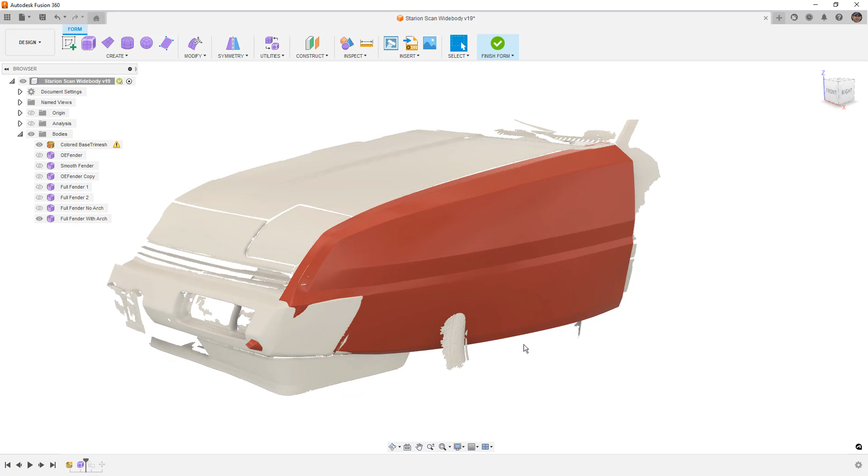So as we explored in the last video, it was very tricky for us to get these straight edges or lines after the fact. It was just way too difficult for us to do. So we took a step back, we got rid of all of that information in the middle, and we patched it up so that it would essentially be a fender without the opening. So now we're going to talk about how we can put that wheel arch back in.

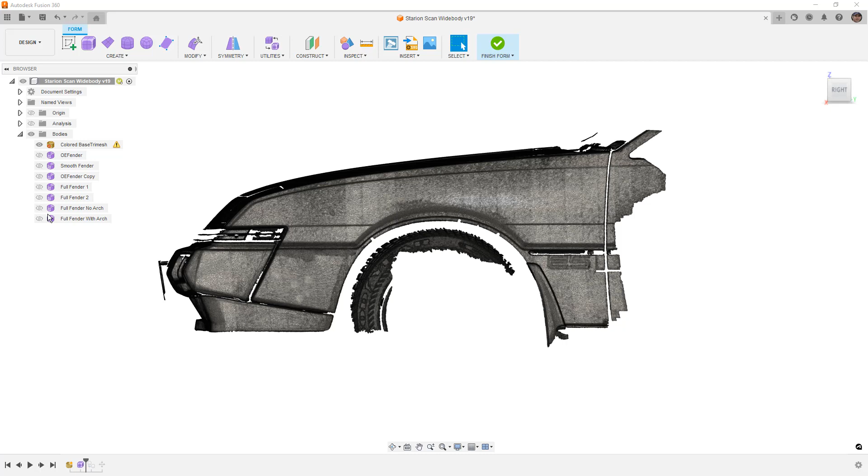However, there were some things I didn't like about it because, as I mentioned, I really want to carry these hard body lines through the design. That's something that Mitsubishi didn't do when they made the wide body version of this car. These lines were just not there on the wide body version. They started to pick up right before the door and they disappeared on the rear fender as well. So I really want to carry that design element into this wide body version.

So at this point, we want to be happy with what we have on the screen because it's only going to get harder for us to make adjustments. Because this is, I'm sure, not my final version of this, I'm going to continue on with it. But if there's anything that you want to change or fix, now is a good time to do it. The next step for us is to take one of the smooth fender designs. It doesn't really matter which one. And we are going to copy the opening.

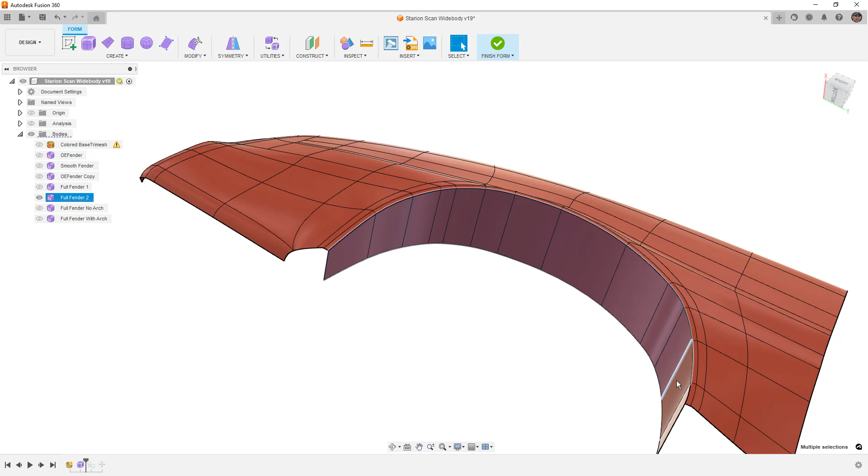So you can take the one that we did previously. It doesn't really matter because all we're doing is taking this inside piece and making some adjustments. So I'll take this one. This is the last one that we did. I'm going to copy these inside faces and just rotate this around a little bit. And just like before, Control C, Control V. Then what I have is essentially the open wheel arch. We're going to bring back our full fender with arch and see where this thing hits.

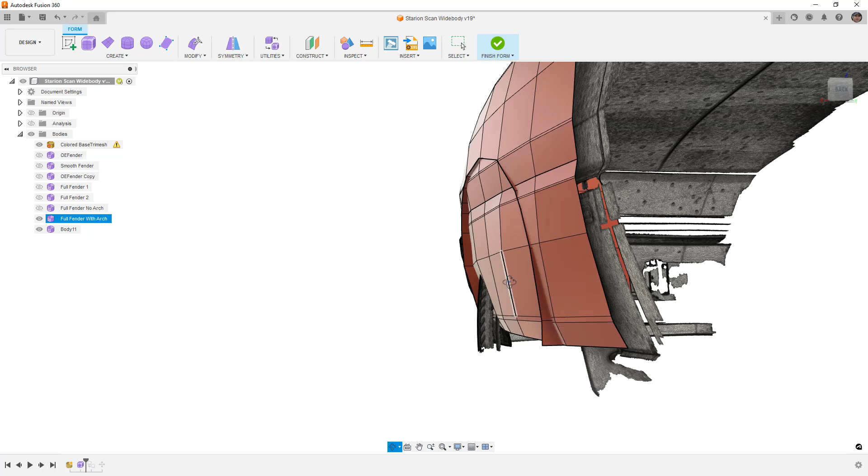Now, if this is behind anything, now is the time to fix it because this is going to be really tricky for us to patch. So that either means adjusting the fender flare, pushing this back closer to the car, or pulling this further away. One thing that I do want to note is at the bottom of this, and let's go ahead and make it box display, it flares out like the original because I have the mud flaps on this car. Obviously, we're quite a bit wider than the original, but that is the reasoning for why it flares out.

And then we also want to make sure that we take a look at the overall shape of the fender. So it bulges out and then it goes straight in the back. If that's the intent, perfect. But again, now is the time to fix it. So I'm going to take this outside edge and use Modify Edit Form. I'm going to reset my pivot point and put it down here in the front because I like that location. And then I want to rotate this thing. That's going to give me a little bit of extra room to play with, to space things out.

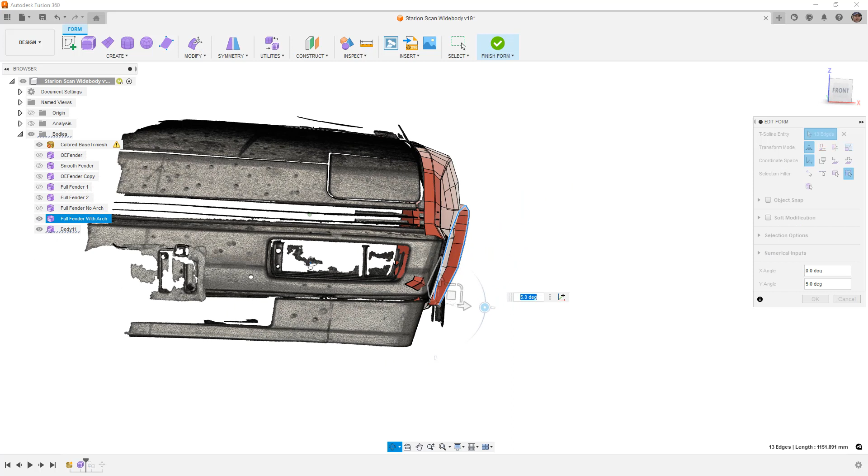And as long as we're happy with that shape and that location, then I'm going to left click and move forward with the next part. Now the next part for us is going to be to make a fender lip. Now remember, when you're extruding from something like a wheel arch, we want to try to get that pivot point as close to the center of the wheel as possible.

So when you reset a pivot point like this, you can't select anywhere that there's not geometry. So we really need to have something to select, but then we can manually move it down and get it close to where the center of the wheel is. Then if we use Alt, we're going to extrude the edge. Alt and Control will extrude with a crease. Because ultimately we probably aren't going to have a crease there, you could do it with or without.

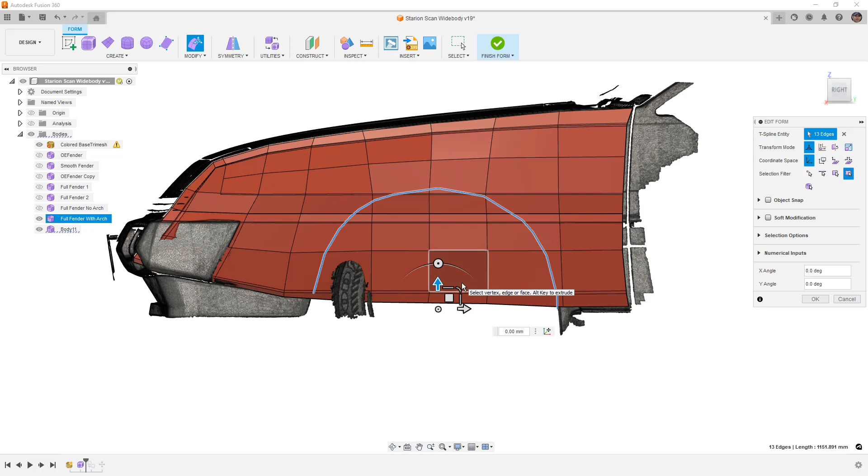I'm going to do with. It's just kind of what I generally do. And I'm going to just extrude that out. And for now, I'm going to say OK. I'm going to go to my Insert Edge. And I want to figure out where I want this edge or this lip to be.

Now, one thing that is extremely difficult to do in forms is to get a nice, consistent width on a face. Using this method of scaling out from a pivot point that's at the center of the wheel does help, but this is one of those areas, just like adding those straight edges, that is really difficult to do. So make sure that you take some time and just work with this geometry as best you can.

So now that we have this, the next thing that we want to do is figure out where the edges on the surface underneath hit this design. Because ultimately we're going to trim away a lot of this geometry using Insert Point. And then after we trim it away, we are going to start attaching it to the fender lip in this case. So in areas where we don't have any edges like this one, I'm going to double click it to make sure I grab the inside portion of it. And I'm going to hit delete.

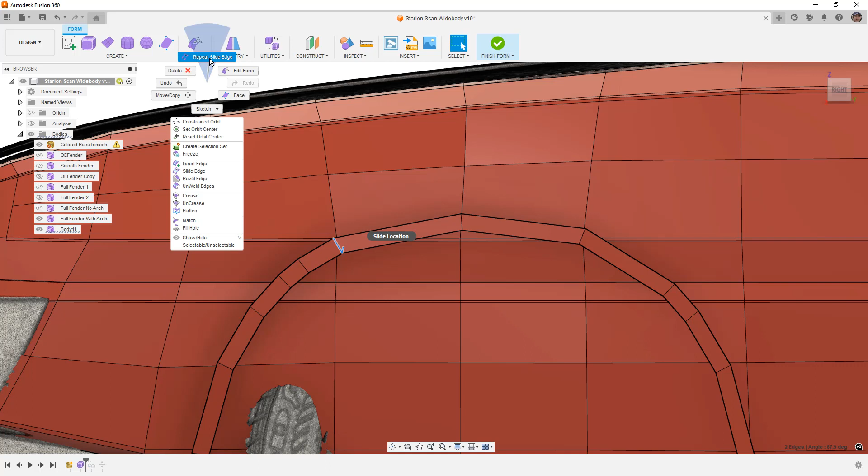Now this is problematic because now we have this weird flat spot here, and if we go into our smooth display, it might not match the car anymore. You can see how it's kind of dipping down there. So we want to make sure that we address that, and we're going to do that by using Modify and Slide Edge. We're going to pull this one closer to the center, and probably take this one. I don't know why that slide location is staying on the screen, but we're going to take this one and maybe pull it to the right a little bit. So that'll help. We will have to do some adjustments after the fact, but that gets us closer.

This one here, again, there's nothing for it to attach to, so I'm going to delete. This one is relatively close to this edge, so I'm going to leave it. This one's close to this edge, so I'm going to leave that. This one's close there, and this one's close there. And again, this is part of the reason why we did that original exercise of making the OE fender, because we looked at where all these edges were in order to make this shape, and that dictated things downstream. Now obviously this original shape is very smooth because we didn't add all the edges to control it. That's the basis for what we've done for pretty much everything.

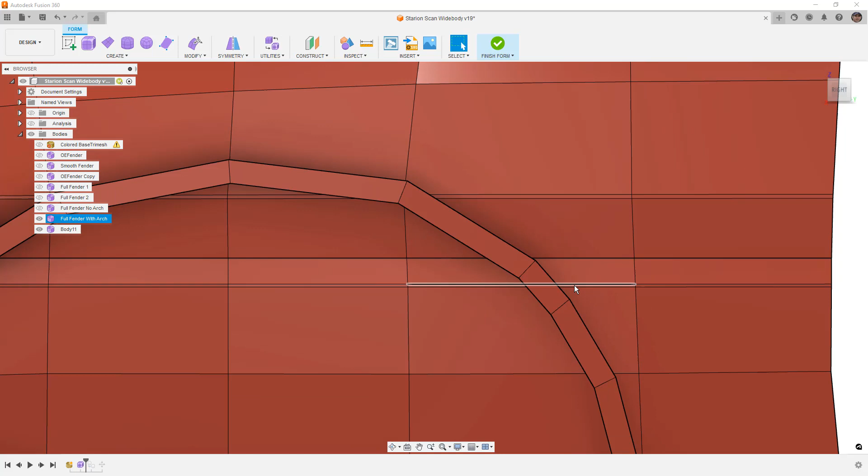We're going to do the same thing over here. It looks like this one hits pretty close. This one hits close. That one is relatively close to there, there, and at the bottom. So it's not perfect, but it's close enough. Now that we have that, we are going to go to Insert Point, and we are going to start breaking this up using Insert Point around. Now, there will be a couple of challenges. For example, this edge right here is going to be problematic because it crosses over where our wheel arch is. So it's going to be tricky back there.

We're going to have a couple of areas where we're going to end up with star points, and we're going to have to deal with that. But for right now, kind of take a look at the overall design. And what we want to do is we want to start to break it up and follow the edges that we have on our wheel arch.

So for example, I'm going to come over here and just sort of follow this around, trying to stay fairly consistent with the shapes that I'm working with. Now here, again, this is where it gets tricky. If we go to here, we are going to guarantee that we have a star point. For right now, that's okay. I'm just going to allow it and come down here and hit enter.

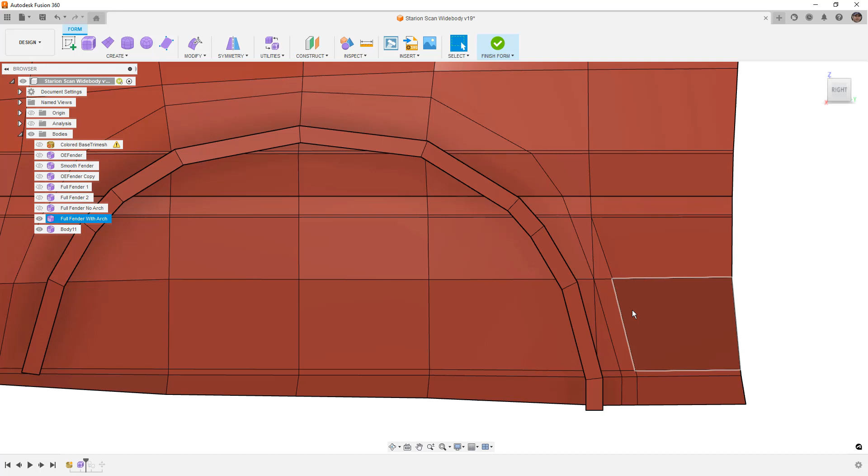I'm going to repeat that, and probably what's going to happen from this edge, we are going to just essentially bring that edge back. Remember, at this point, when we insert points like this, it's going to be flat, which is not great for our curvature. We're going to have to deal with that. But for right now, it's okay.

The next step for us is to select everything inside of here. Now, box select from the bottom right to the top left will grab everything that it crosses. We'll have to do a little bit more work over here, holding down Control or Shift, and then just hit delete, and we got rid of it. Again, we're going to have to deal with this. I'm going to take that edge right there, hit delete, and get rid of it. And hopefully that doesn't mess things up too much.

If you take a look at Smooth Display, you'll notice that some of these are going to start to be problematic. We'll have to go back and work on it. Looks like there's a relatively hard crease right here, something we're going to have to deal with as well. But for right now, this is okay. So back in box display, bring back our wheel arch.

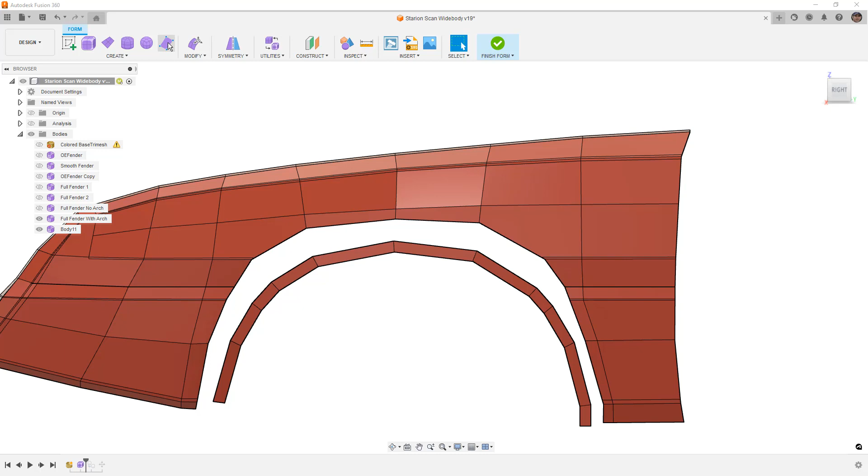Now, in some cases, you might try to do something like a bridge to connect these, but because we have so many extra edges where we're controlling those creases, it's going to be tricky to do that. So my suggestion is to use the face tool and begin creating four-sided faces, just using this by snapping to the vertices wherever possible. Now, when we get to areas like this, it's going to be trickier because we can't just continue on because of that edge right there. So I'm going to say okay for now.

I'm going to delete that edge, leaving a T-point over here. I'm going to have to do the same thing back here, and I'm going to have to do the same thing down here as well. We might bring those edges back at some point, but for right now, we're going to get rid of them just because it's going to make the process easier for us to build that. You can already see that that is going to be a problem because of the way that angle has changed there, but again, we're going to fix that.

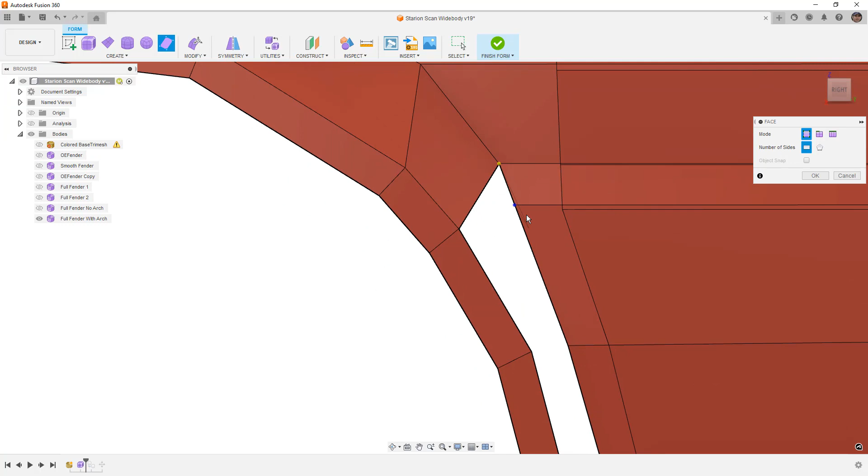So once again, we're going to just use the face tool, selecting the four sides. We'll go here. This one is not really going to work. I can't really make a triangle. We'll come back and fix that one later, but I'm going to carry on. Anywhere that I do have a four-sided section, we'll do that. Carry it on down here. Again, this is tricky because of that edge. I'm just going to skip over it and then delete this one and use the face tool again.

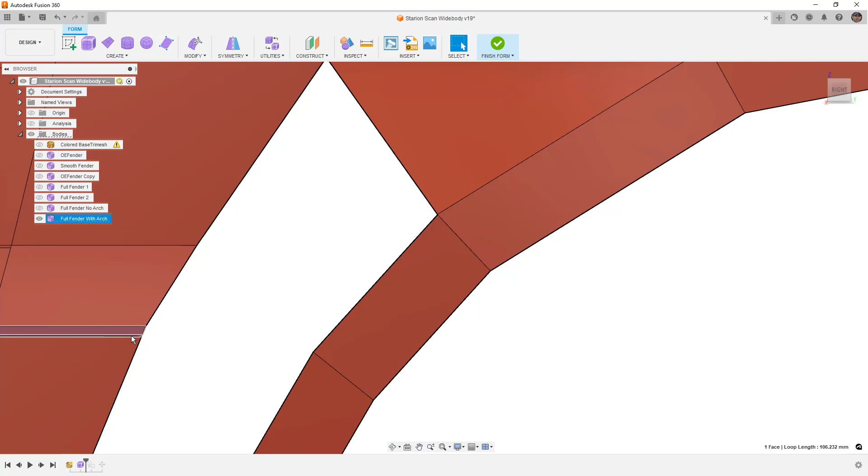So the ultimate goal here is for us to build the fender how we want it without the opening, and then build the wheel arch how we want it without the fender, and then we can come back and start to connect all the pieces together. Now this is a little bit of a similar workflow to surfacing. When you're surfacing, you generally build one face or section of a design at a time, unlike solids where we generally build the entire solid.

Here's another area where we're going to have a triangle, so I'm going to skip that for now. And then we'll come down here. And then I'm not going to worry about anything below this for right now.

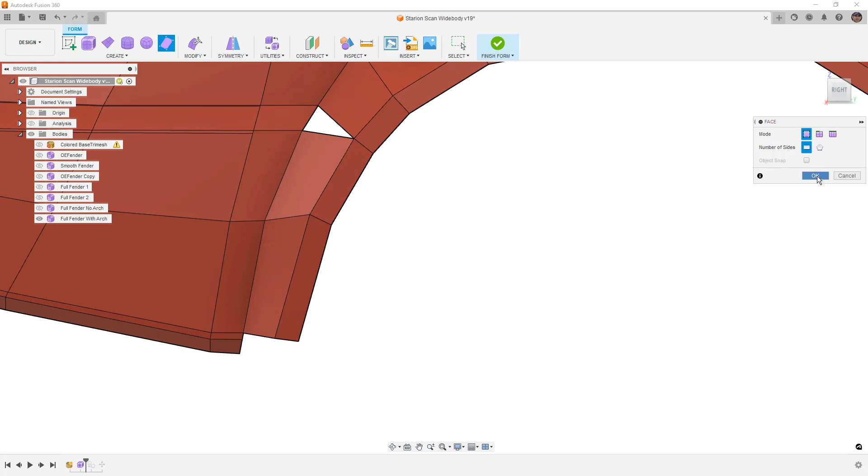So if we take a look in smooth display, obviously those triangles are problematic, but the overall intent here to keep those creases seems to have worked because those edges are still there and they're there on the backside. We just need to work on how they intersect with the rest of the design. So Control-6, bring those edges back, Alt and 1, and let's figure out how we can patch this.

So probably the best way to do this is to start dividing up the arch into other sections. That's going to require us to make some adjustments. For example, this one here will likely be better served over here, pointing more toward the center of the wheel. Once we have that, we can get rid of this edge.

What this allows us to do is pull this one over a bit further as well. So with insert point, we're going to come from here, a little bit more straight following the curvature that we're going for. Once again, we want those to point toward the center of the wheel.

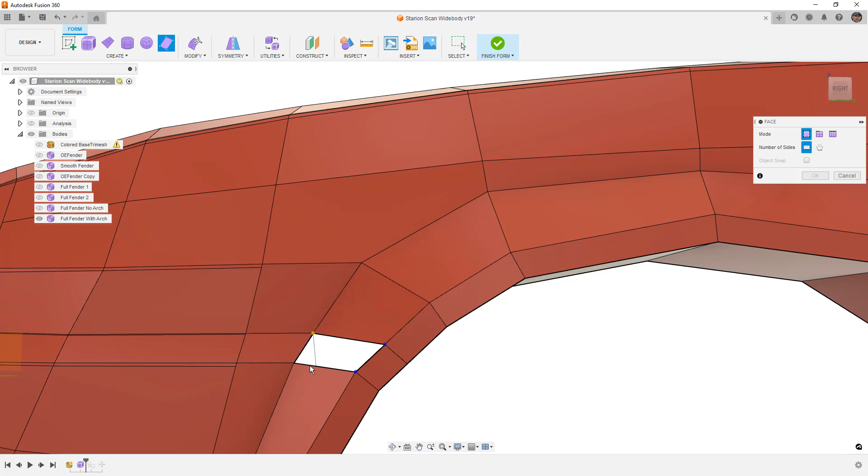This is going to be tricky because of that triangle there, but what I'm going to do is delete this face, and now I can use the face tool to go back and fill those in. So you can see that we got rid of that triangle and we were able to sort of re-topologize.

This also means that we should probably think about adjusting these up here, because having a bunch of these edges bunched together is never really a good thing.

So I'm going to come from this crease - it's not a crease, it's where we put the bridge in there - but I'm going to come from there, work my way down, and back to the back. I'll double click that edge and delete it and get rid of it.

Now we will go back and make some adjustments and move things around a little bit. Right now I'm not too concerned with it. What I'm really focusing my attention on is getting these edge divisions in a good layout that makes sense for the curvature that we're trying to build.

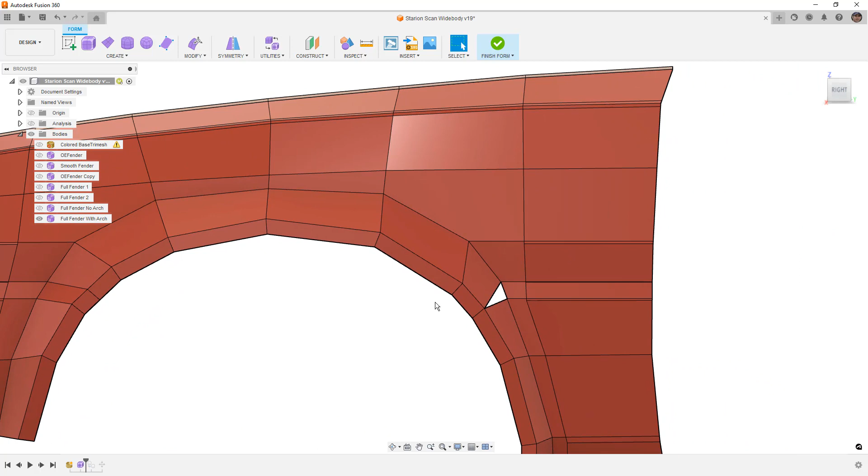So we're going to repeat the process on the right side with insert point. This one we want to come a little bit more toward the center - and what I mean by center is this line, that last point that I selected there. If you were to carry it on the way that you drew it, you would want that to carry on to wherever the center of the wheel is.

It generally is a good idea for us to do. It'll allow us to build the curvature a little bit better. So I'm going to just delete that edge, and then reconnect it over to here.

So this will give me this triangle. I can get rid of it. I can use face and sort of fill in that area. So once again, the general process here is that we're trying to keep things relatively consistent.

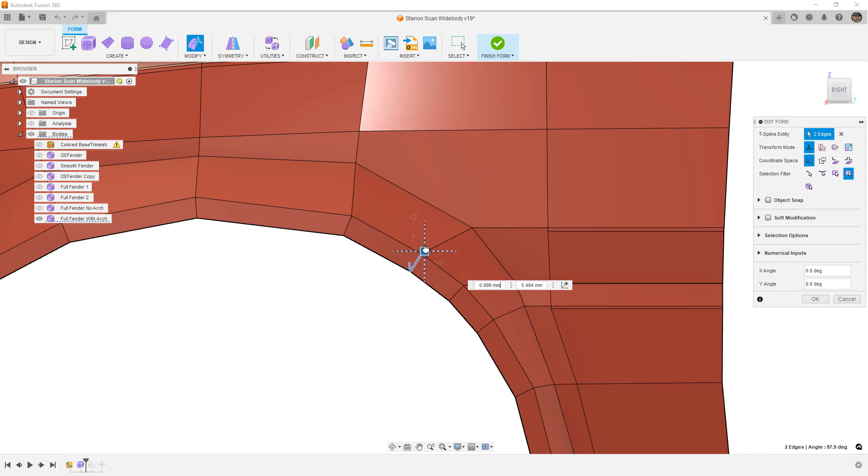We don't really like when we've got these sections that are bunched up. In some cases, the geometry is going to force us to do this. So in this case, one of those times where we're really forced to push these into a layout that is not ideal.

But it doesn't mean that we can't get a good result out of it. This one here likely needs to be adjusted as well. We might be able to use slide edge, or we could use the same insert point option.

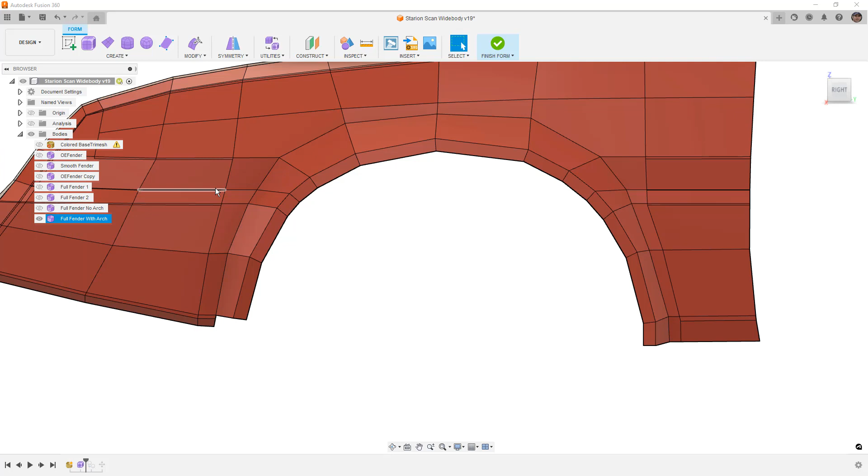Just so you know, anytime you see the browser go black in Fusion 360, the browser is rendered to the screen over top of everything. The way that it's done is slightly different than the rest of the UI. So sometimes when things are processing and they're really thinking, oftentimes you'll see that go black because you can actually undock the browser and put it wherever you want. In this case, it's not white anymore, so you can't see through it. But when it's docked over here to the left-hand side, you can see behind it. So it's kind of hard to visualize the fact that it's sort of blacked out like that.

All right, so now let's see what we have in Smooth Display to see what needs to change. This is usually the next step in this process. If things look okay in Smooth Display, that's usually a good sign. I'm going to hide the edges and kind of take a look.

As we rotate this around, we can kind of see this crease right here is carried into the fender opening, which I don't like. Same thing over here - I really want that to be smooth. But overall, it looks pretty good. We maintained somewhat of the original design, we've got the edges there. There is one problem that I see, and it's this extra edge here.

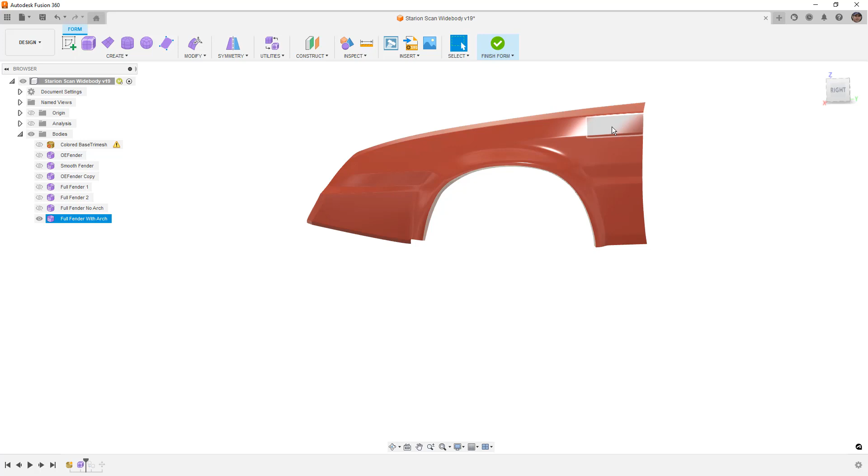Now, that could be okay if that was the design intent, but I'm not really sure that I want it there. So if we bring the edges back, we are going to tackle a couple of these problems. First, we're going to start by going to Utilities and make Uniform and allow it to adjust the form body. Sometimes this is a good thing, sometimes it's not.

So what we're going to do is take a look and see what it did. It made a mess over here. So we're going to do Control Z to undo that, and we're going to do some of that manually.

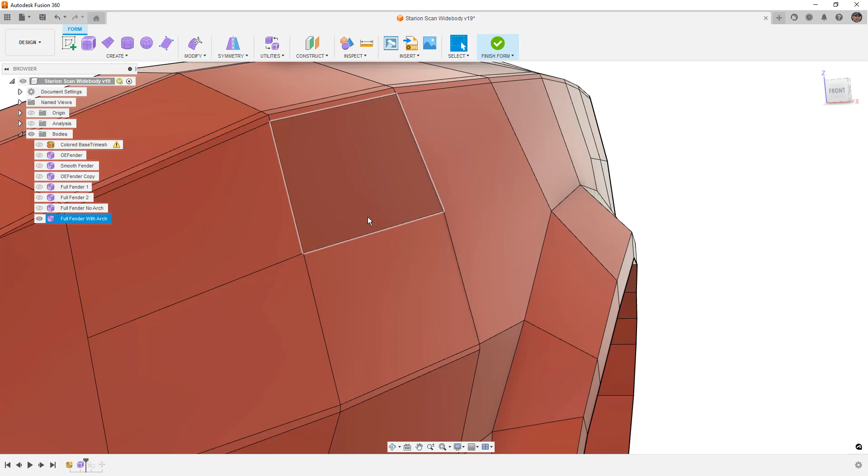The next thing is this edge right here. Part of the reason why we're getting that crease is because of the way this bulges out then back in. If you want an edge to control the geometry there, what you can do is delete some of these edges, allow those faces to get back into a path of least resistance, and then you can add edges back in.

Essentially what's happening is this N-gon—if we go back to box display, we've got this N-gon, or this thing that has 5 sides on it. This is causing a problem because at this point we have a lot of curvature change and it really doesn't know what to do. So this tells me that I need to work on retopologizing this.

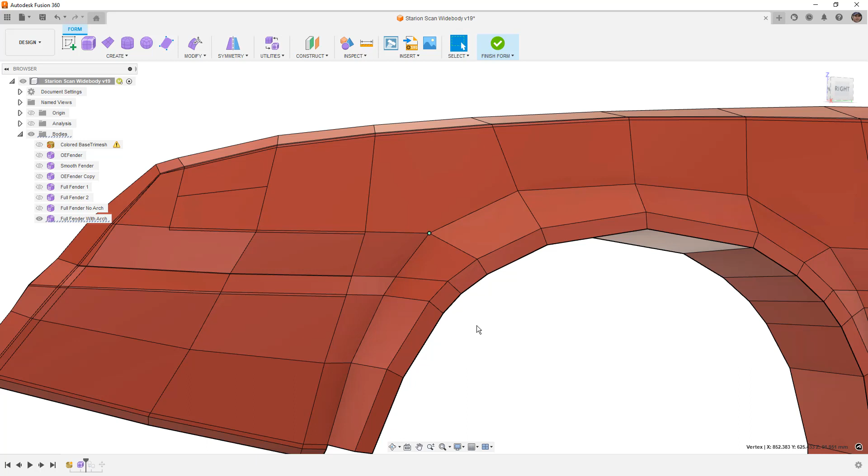And I know I use that word quite a bit, but essentially what we need to do is change the flow of these edges. So let's go back to a right view and take a look at this and see what we can adjust and plan out.

I think what I want to try to do, and this may or may not work, is go to Insert Point. First I'm going to take—I don't like this point floating out in space—I'm going to take this up to the front, and we'll come back and move that later.

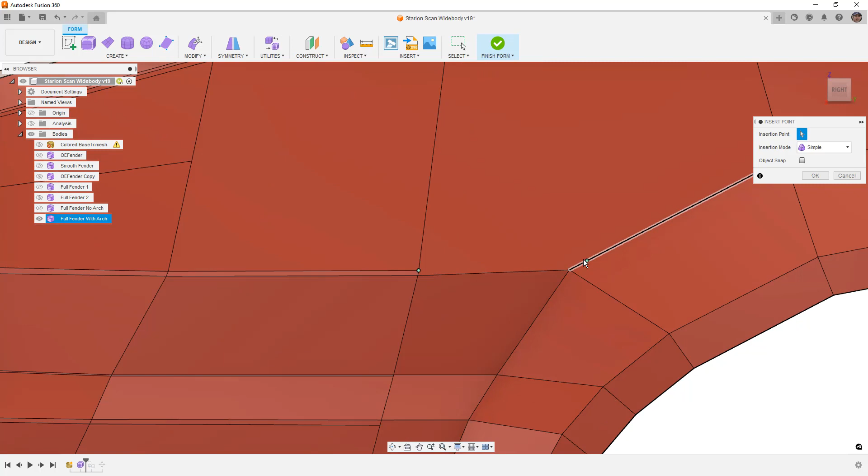And then I want to carry this one forward, but then I want to delete this edge and weld these two together. Part of the reason I want to do that is because I'm going to carry this edge up further. And while it's still going to be an N-gon, this is going to fundamentally change the way that the curvature happens on that face. So we're just changing that N-gon and forcing a little bit more control.

So if we take a look at this in smooth display, and now we go to our repair body and we make some adjustments, we can make that T point or that star point a T point, and you can see when it's a star point, there's really a lot of problems in this surface. Some of them stem from this point right here—you can see that's carried forward as well. When I make this a T point, it sort of moves things around, but it doesn't fix my problem.

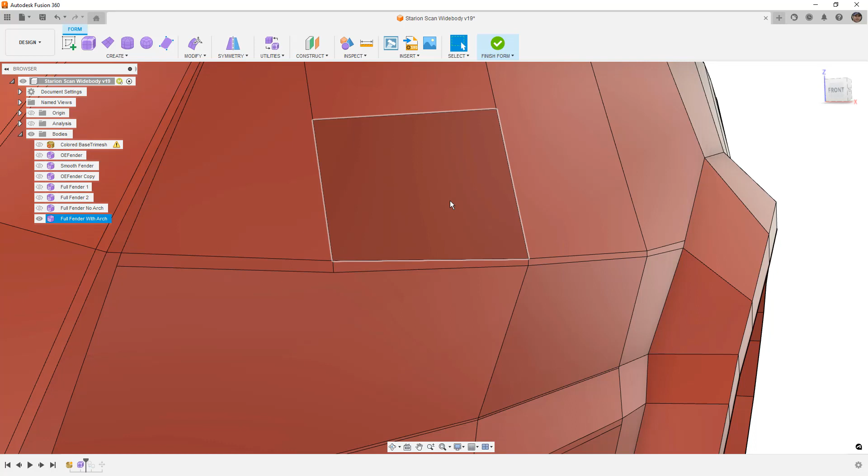So we're going to hit cancel, go back to our box display. Hopefully, let's see if it'll do it. All right, back to the box display. And if we don't need this edge here, better off to just delete it. Same thing on the back side—if we don't need it, we'll just delete it and take a look again.

So with that gone, things seem to look a little bit better. And this is one of the reasons why oftentimes you'll hear me say that I avoid T-points and star points whenever possible, because honestly, they're nothing but trouble. You can't really get away from them on every design, but if you can, then I do suggest that you do.

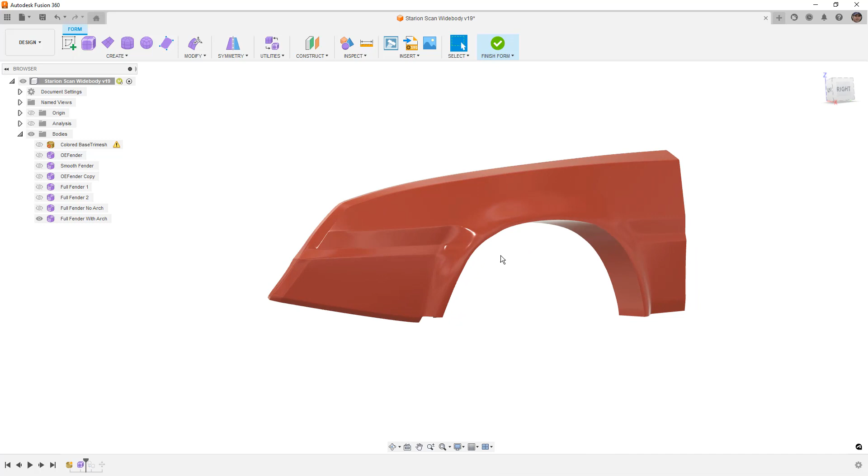So there's a lot going on. It's still a lot to do, but we're making good progress. We now have those hard edges in our design that we struggled with before. And again, a lot of this is getting cut out, so I don't really care what's happening up here.

It doesn't look great up here, but it's all going to get cut out based on the original fender, so that stuff doesn't really matter to me. All these little wobbles and things happening in the surface, because I'm going to cut it at the bumper line, cut it here at the bumper line and around that marker light. So just keep in mind that all that stuff is going away. Overall, this looks pretty good.

I do not like what's happening here, so I want to put a little bit more effort into that. I think that we can do a better job there. But overall, I think we're getting quite a bit closer.

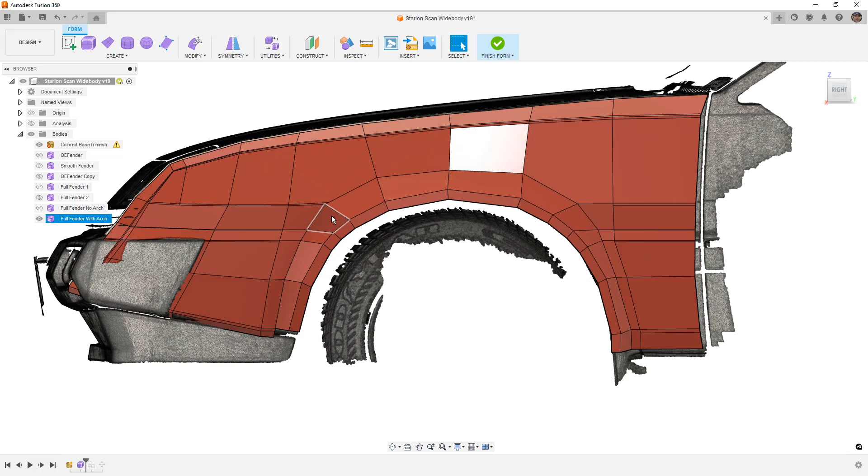So back on the edges, back on box display, what we can do is tighten up this transition a little bit. To do that, I'm going to go to Insert Edge, and I'm going to put an edge right there. Now, when I do this, if we take this edge and try to delete it, we're going to see if Fusion can patch everything up.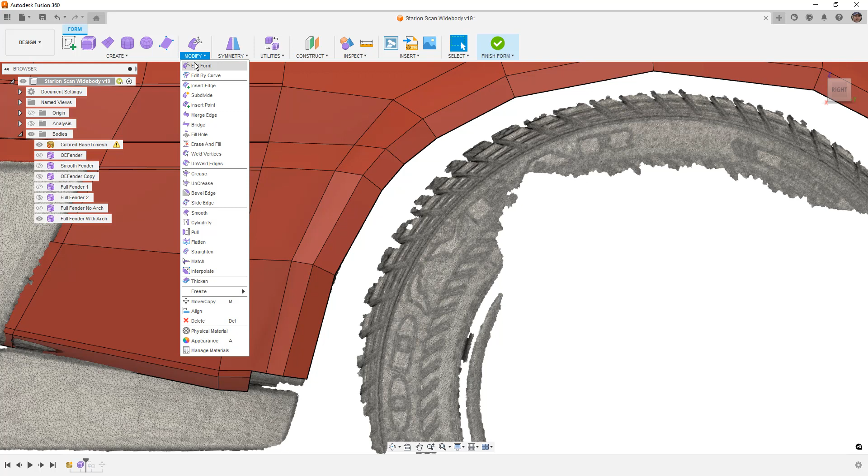And it does a pretty good job. There are some things that we need to change. For example, down here, we don't really want that point there, so I'm going to pull this over. That'll clean that up. Did that happen anywhere else? No, it doesn't look like it did.

So overall, what we did was we made that lip, that flare, a little bit smaller. I'm also going to end up adding another edge to control it a bit more. This is where I say this is an area where Fusion struggles, because forms in general struggle, since it's really hard to get that geometry to be perfectly round or perfectly consistently spaced. But it is possible.

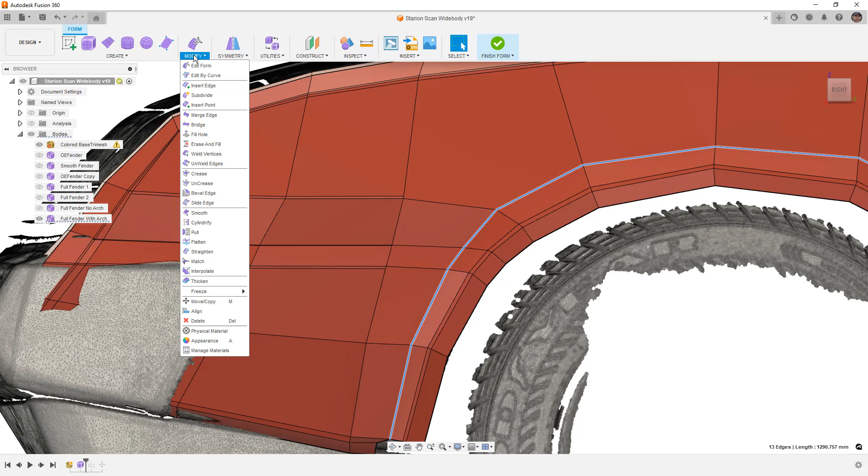So what we're going to do is take this edge. Actually, let's take this edge and add a bevel. Instead of 0.05, I'm going to do 0.1. And then I'm going to take this other edge. Instead of doing a bevel, I'm going to insert edge, simply because it's going to cause problems if I do a bevel down there. But I'm going to put it relatively close as well.

And then, I don't know why that insert location is staying there. I've noticed that today, the little notes stay there for a second.

So again, this transition here where the edge is perfectly straight, we don't want that. We can move this edge or scale it or do something with it, but we need to make an adjustment. So I'm just going to move it ever so slightly back, and then say okay. Take a look at this in smooth display.

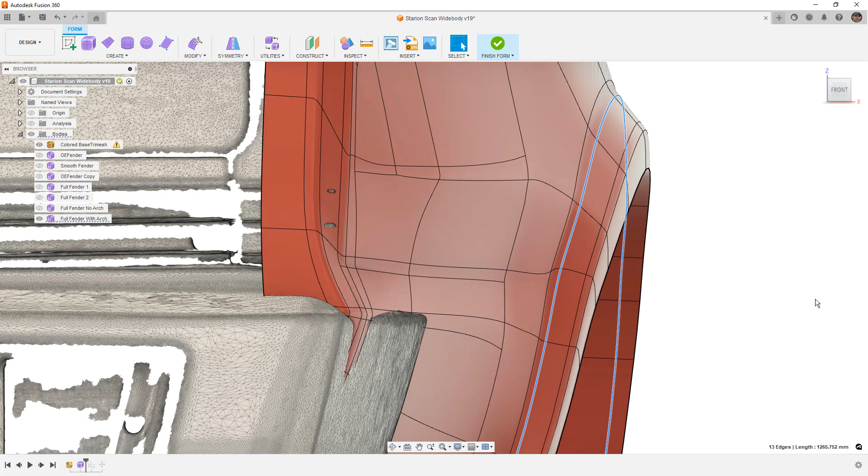All right, so there's still more to do, but let's take a look at this with our edges off. Now you can see there is a very well-defined edge there, and there's a very well-defined edge there. So we're looking closer to what an actual arc or a fender flare would look like.

Now, in order to get there, we had to add all those additional edges to help control it. This is where the order of operations is really important, because you can't just start adding these very early in the design, otherwise it becomes much harder to control. You want it to look approximately right in the box display, and once the box display is looking okay, then we can start to go back.

And you'll notice that I mentioned a few times I didn't like the way that these edges transitioned into the flare portion, but I didn't want to start adding those edges all the way to the flare because I knew that I needed to add additional creases or controls.

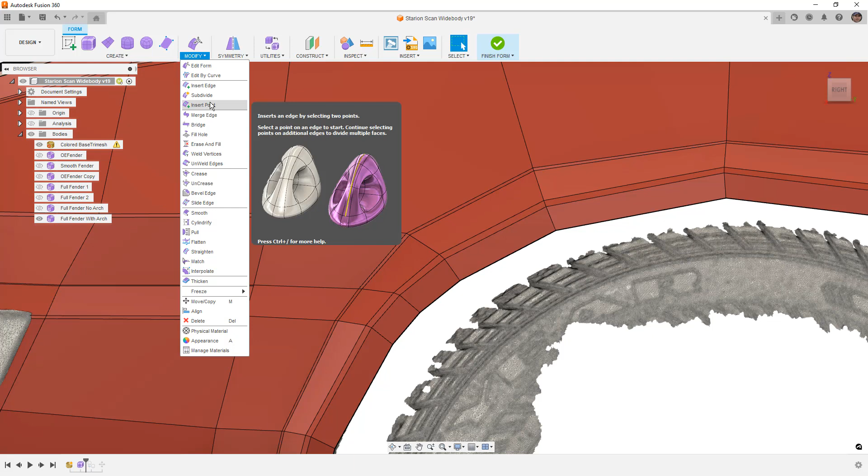So what we're going to do now is go back to insert point. We're going to come from here and bring this a little bit further into the first edge of that new flare, and repeat the process. Now these ones down here are really close together, but I'm going to do the same thing. Notice that I'm actually changing the angle or the width. It's tapering away, and that's intentional.

One reason is because it'd be really hard to get it to be perfectly parallel, but another reason is because this will help us fade the edge away. So if you want it to stay pretty tight, then you would keep those two edges parallel.

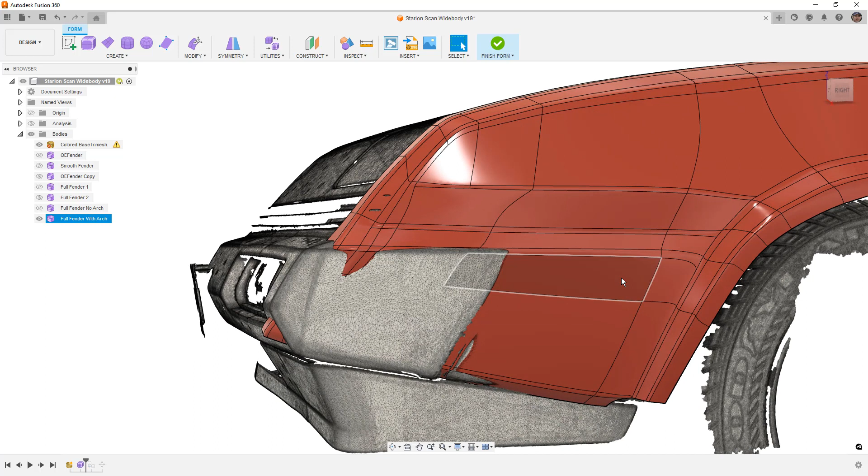If you want it to fade away, then you would sort of taper them away as you go. All right, so now that edge is being carried into the fender. It is turning down, and part of the reason for that is because that's how it is inside of our design. So if we want it to go straight, we need to move these vertices and those edges so that they're straight.

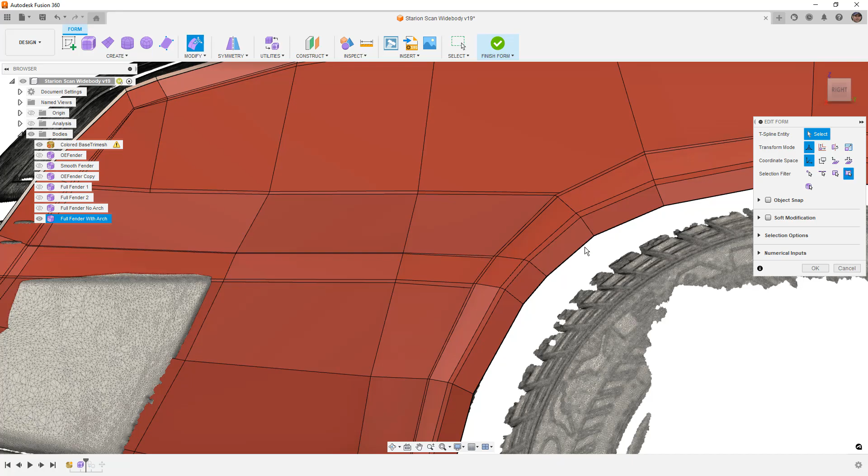And again, we can use things like the scale options, and then we want to move all of this stuff here. So I'm going to just do this manually. I always say that it's not a good idea to do this manually. There are some cases where you just have to, or it's just quicker. And I'm not worried about this design being perfect.

As I'm looking at it, I don't really like the way that this flares out. So from the front, I want to move that in just a little bit. I'm going to go ahead and just pull that back in. And when I'm doing this, what I'm looking at right now is the transition or the angle between the edges of that face. That's kind of helping me drive where that should be.

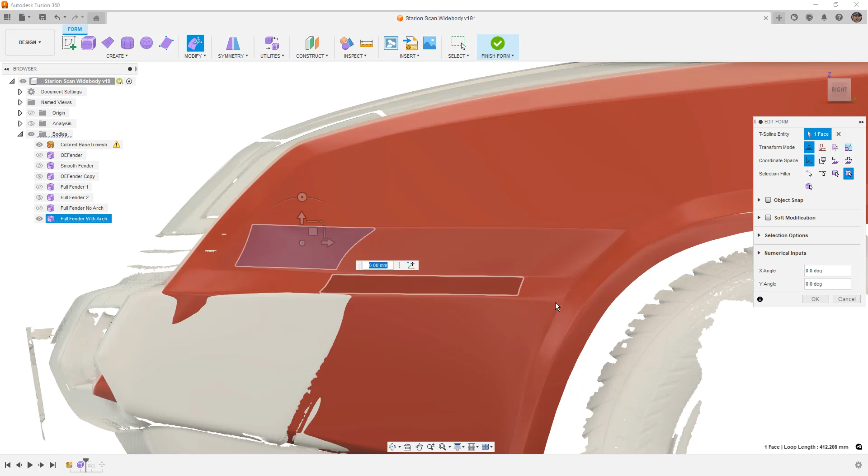And I don't like the fact that this face right here, where that T-point is, has an angle in it, because that can introduce some problems in the surface. So that might be an area where we need to spend a little bit more time. But if we get rid of our edges, now you can see instead of drooping down so bad, this edge is essentially straight back. Not perfect. Again, I'm not worried about the design being perfect, but overall it's accomplishing what I want. I really wanted that style line to be there, and it's looking pretty good.

Now we need to fix the same sort of problems on the back side. And in order to do that, I'm just going to follow the same process. Again, this is sort of drooping down. So what I want to do before I get too far is I am going to move this. I'm not going to be able to get it perfectly horizontal, but I do want to move it a little bit. And I'll probably move this one as well.

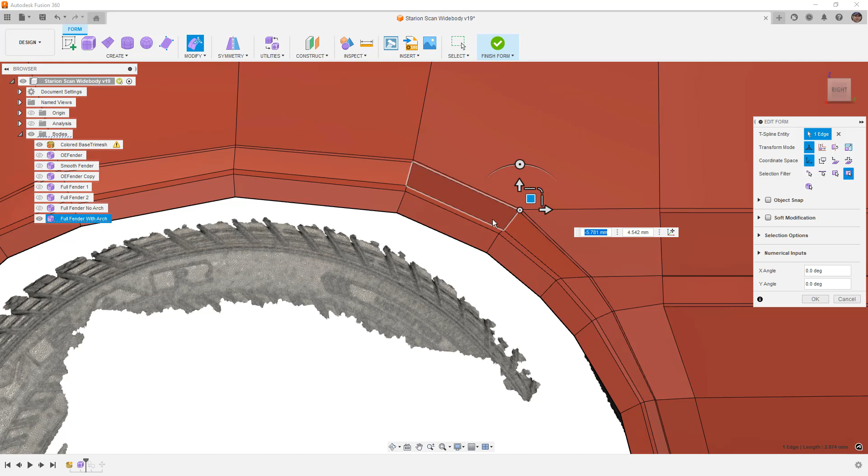And again, in an ideal world, you want those to be pointing toward the center of the wheel. In this case, I am just making sure that I'm not making a drastic change to their angle, because it's going to be a little bit tricky to do this manually, especially if you start moving a single vertex like that, because you're affecting the distance between those two edges, and that can be problematic.

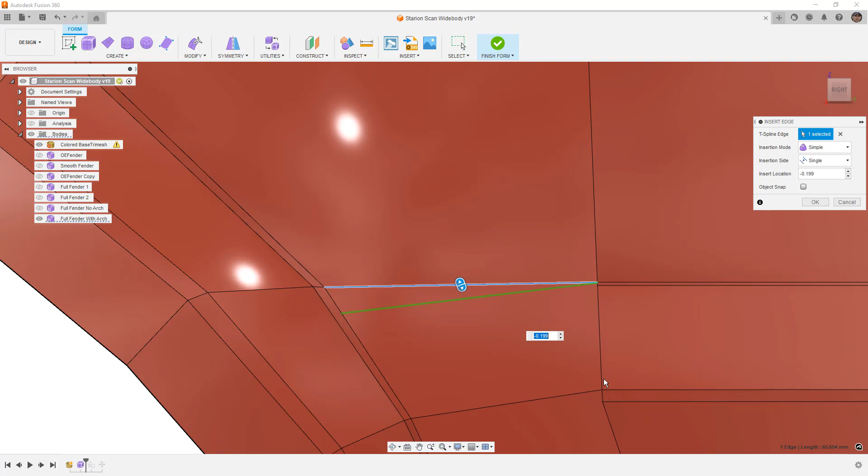So now that we've sort of moved that into place, I'm going to go to Insert Point, and I am going to sort of add it there. Now there is another way that we can do this, and that would be to use Insert Edge. So for example, if I'm inserting an edge just right here, I could insert the edge relatively close, but you can see what's happening because the difference between the angles on these faces, it's actually going

the distance between these two edges here, and it's just not gonna work in this case. In some instances, you can get away with that. In this case, it's just not gonna work for us. We have to do it manually with Insert Point. So we're gonna come in, find that point. This one I'm gonna take as straightforward as possible because I wanna carry this edge. And I'm gonna do this one more time.

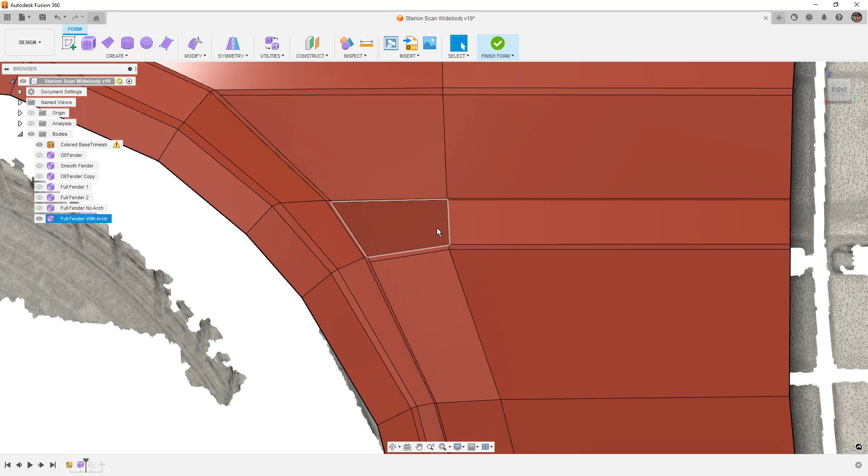And again, some things that we should always look at. Whenever you have a T-point like this, you never want these two edges to have that little bend in them. You always want that edge where the T-point is to be straight. Otherwise, you don't really have great control over what the curvature is doing after that point. So Control 3. And now you can see that we have gotten rid of that weird ripple that we had up there. We are carrying those hard edges like the original design. And overall, it's looking pretty good. I'm happy with the shape.

If we look at it from the front, I'm going to change this to just perspective. And when we look at it from the front, we're carrying that sort of OEM edge, that ridge that was there, just made it quite a bit wider. So we have the OEM front piece, we have this lip, and again, everything from here down is going to get cut away.

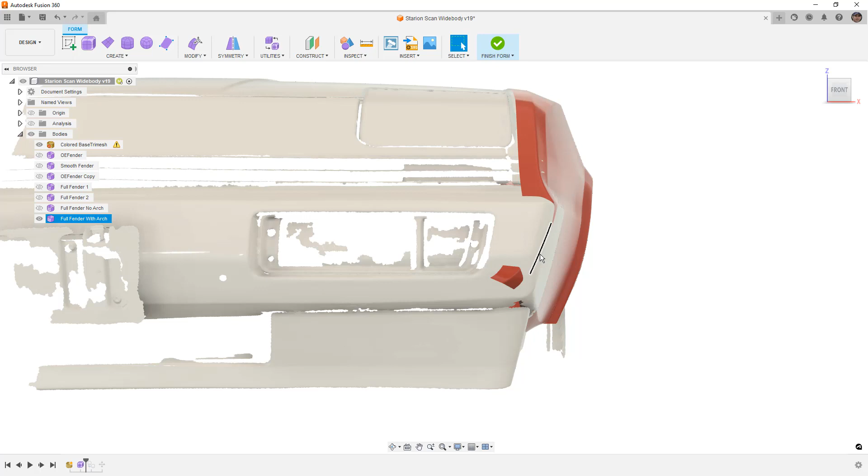So I don't really care what's going on here and that this is lipping around. This is really just trying to match the bumper shape, so that way when we carried it through the design, it was sort of apparent. We could do a little bit more work in here, but overall that looks pretty good. There is a little bit of a jog that happens there, but I think that's okay. So yeah, that's okay. This edge is probably a little tighter than the factory edge, or at least it looks a little bit tighter. But overall, I think it's okay.

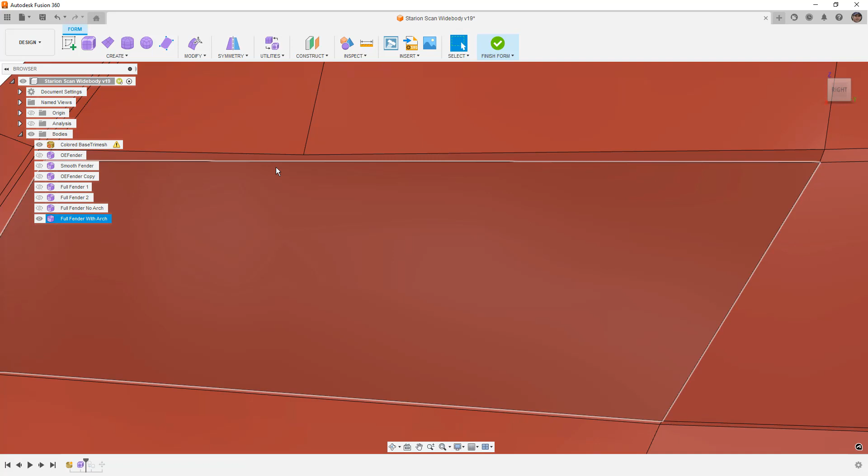The other thing that we need to think about is this T-point. Now, I mentioned that a little bit ago, how that's potentially problematic. We need to think about whether or not we need it, especially once we get past that first edge. So if I hit delete and try to clean that up, you can see that these two edges are no longer parallel. So that's a problem for us because we want to make sure that they stay an equidistant apart. I can take this down to, let's just say, the other side of this one and hit enter. Those are already straight, so I shouldn't have a problem with those edges.

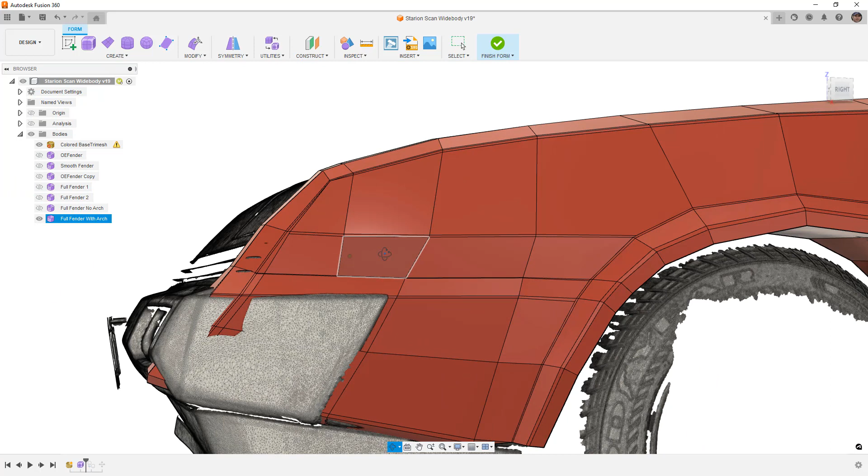And if I take a look at this in smooth display, I want to make sure that I didn't accidentally make myself more work. So what I'm going to do is just rotate it around. Remember, this is all getting cut out in that area, but I still want to work towards making sure that it's okay. And this is also a great way if you wanted to redo, obviously not on this car, but if you wanted to redo things like where the marker lights are, you can carry those details a bit further up. That can be really helpful. Let's also make sure that the back edge is okay, the way that this rolls into the fender. And I think that looks pretty good.

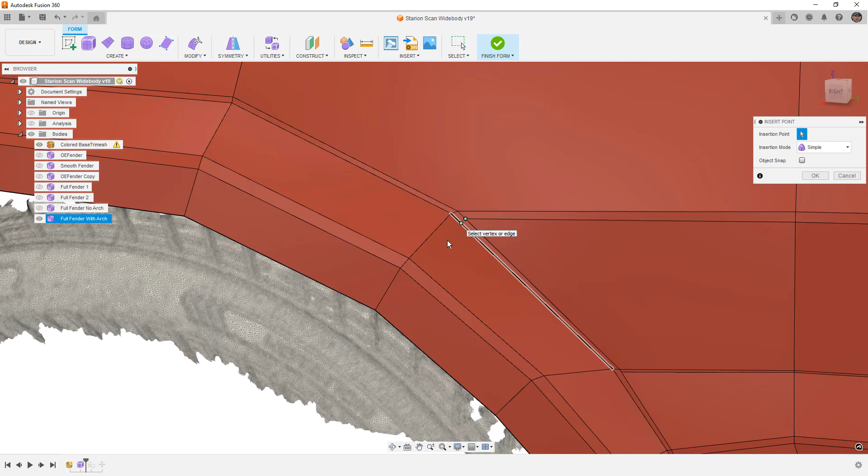If you want to carry this into the fender more, the way that we would do that, so for example, if we wanted it to go into the fender but fade away, I would carry it across this and then maybe bring it out just a bit. Now generally when we use insert point, we want to go back and we want to edit or adjust that edge. But what this allows us to do is potentially carry that into the flare a little bit. We can kind of see the way the reflection is looking. Now, I don't want to do that for this case, but just mentioning it that if you want to, you can. And you can kind of see when we undo and redo the way that the curvature changes, it pulls this edge up as well. And again, these are just things that you have to work with and deal with.

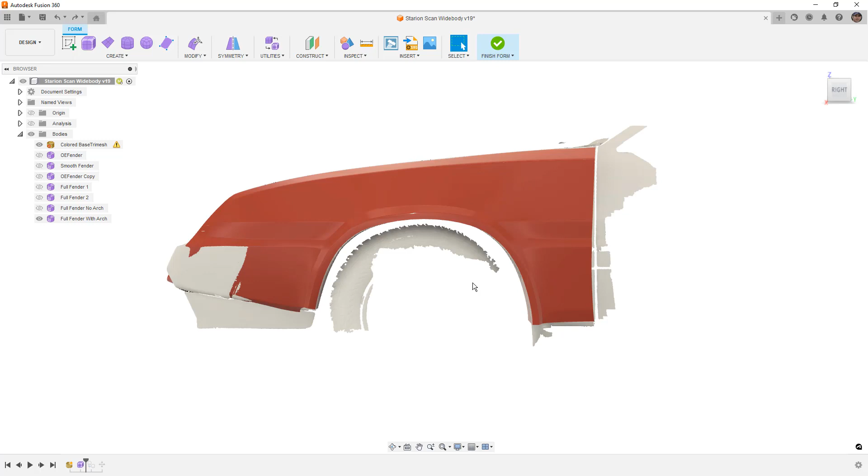Now, I'm going to go to Control 4 and hide my edges. From an overall standpoint, I think this looks pretty good. It still does need a little bit of work. For example, down here, we need to connect all of this geometry together. And now we have a bunch of these little edges that are going to make this more of a challenge. We also need to think about how much of a wheel arch we actually need. So one good way to fix this is to insert another edge, potentially close to the front, double click on that back edge, and then just delete it. So that way we can shorten up the lip.

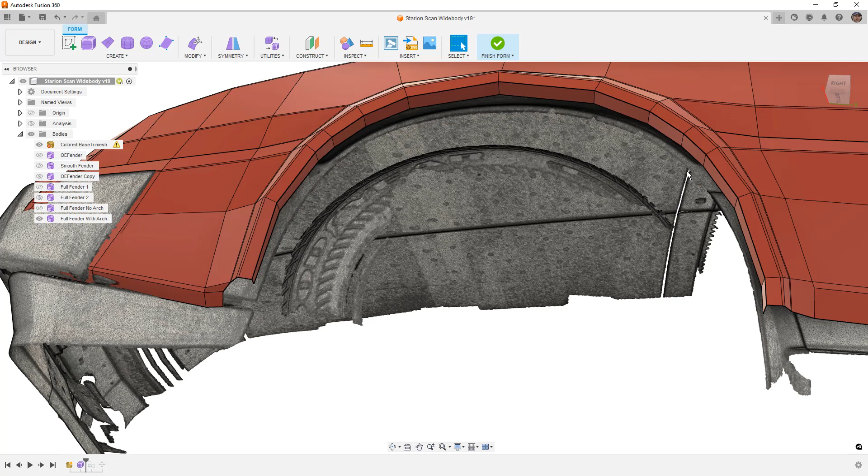Now in reality, the lip is going to be fairly small, especially if you're trying to tuck a really big tire. So you may have to do that again and pull it a bit closer, and then maybe extrude that out. So we can take this edge, again, delete it, and then maybe take this lip using modify edit form and sort of extrude it out. So again, we want to make sure that the pivot point is roughly where the center of the wheel is. I didn't scan the center of the wheel, so I kind of have to just guess. And so once again, Alt and Control, and I'm just going to scale that out just a little bit.

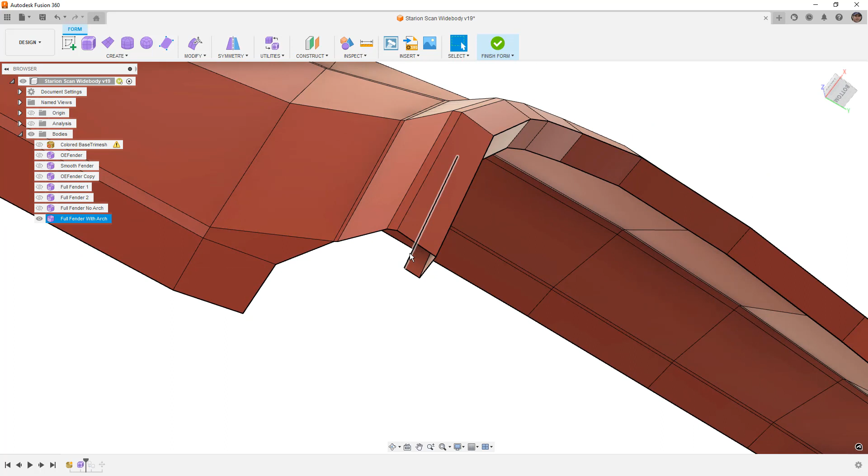And now if we rotate this around, I'm going to hide the mesh, speed things up a little bit. So now you can see we just built that lip on the inside, give it a little bit more structure. But at this point, we do need to fill in this corner. We need to figure out what's going to happen here. And again, we have a couple of extra edges, which unfortunately complicate things. But what I'm going to do is take this one here. I'm going to pull it forward so that it's roughly about where this is.

And then can start building out all the little pieces that connect it. Now, again, as I mentioned, there's kind of a lot going on here with all of these extra edges. We can build T-points, but it's going to be tricky for us to do on the fly. So what I generally would do is maybe get rid of the edge in the middle of this one. Now I'm going to have to go back and add it later, but what this allows me to do is potentially use tools like bridge or face, and then build a face off of this.

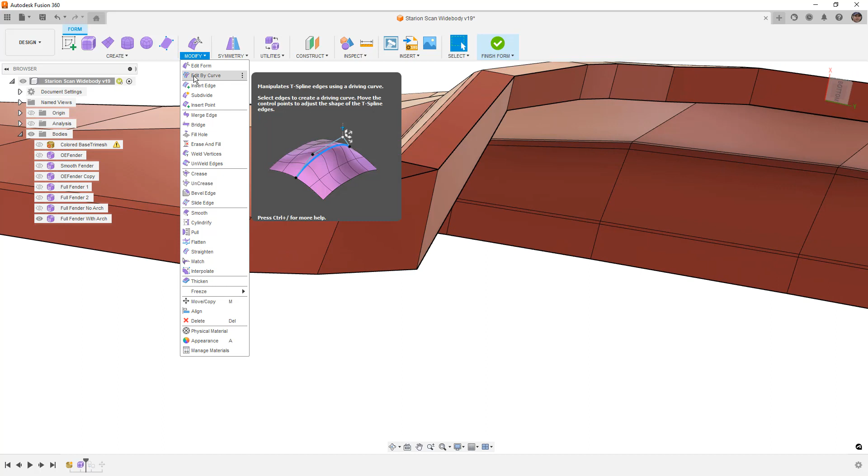And then I can insert points. So I know that I've got a division here, and I know that I've got a division there. So then I can come back and weld the vertices together. So maybe bring this up to here, maybe bring this back to there. And this is the way in which we can start building out these little pieces.

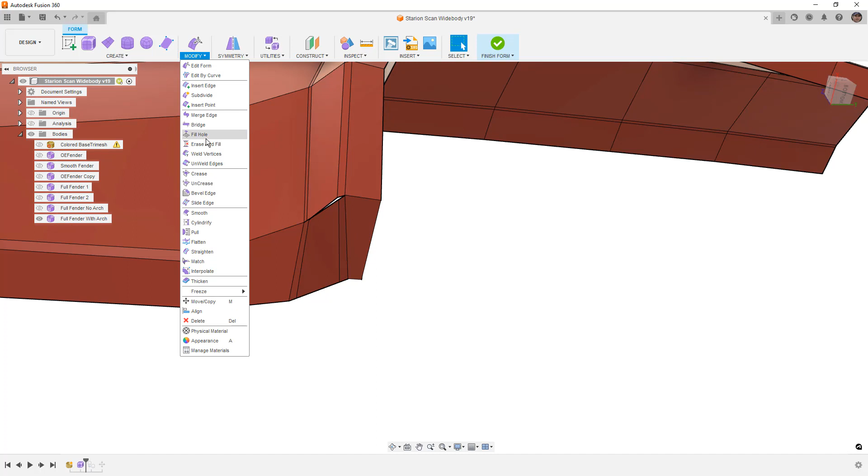Now at this point, this thing is not going to let us go into smooth display. It just doesn't know what to do in that corner. If it does, it's going to be really nasty. But what we could do is, again, we can add those extra edges. We can use insert edge and put one maybe right there, and then right click marking menu, put one right there. And these are all flat, and usually that's a pretty bad thing. In this case, I don't really care because it's at the bottom of this lip.

But now I can go back and use insert point, carry this back across, maybe to there, just let it build a T-point. And if we take a look at this in smooth display now, Control 4 and hide the edges. So you can kind of see us building out that little flared piece and how it rolls in. And you can certainly continue to work on the transition here.

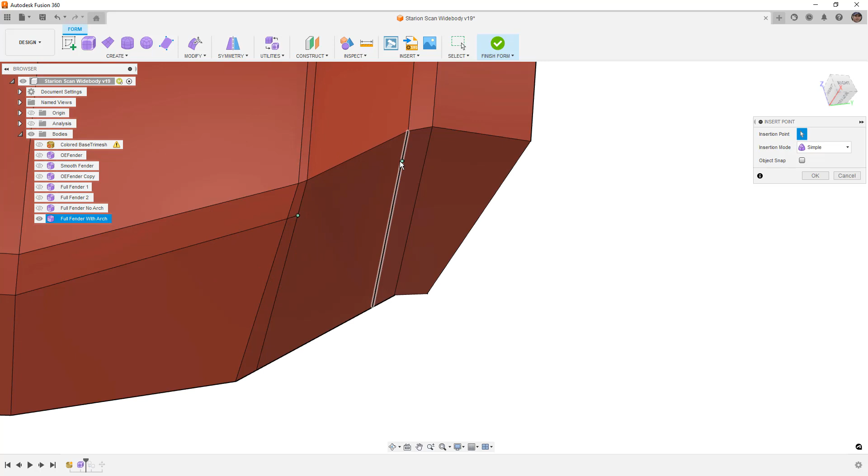So for example, if we wanted a little bit more control over that as a corner, what I could do is bring this all the way to the end and then start to move some of this. So for example, if I bring this down a little bit and maybe bring this down, now what we're doing is we're carrying that curvature a little bit further. Now this inside edge being a crease is not ideal because now we've got a crease that ends at a smooth section. And what we can do is we can uncrease that.

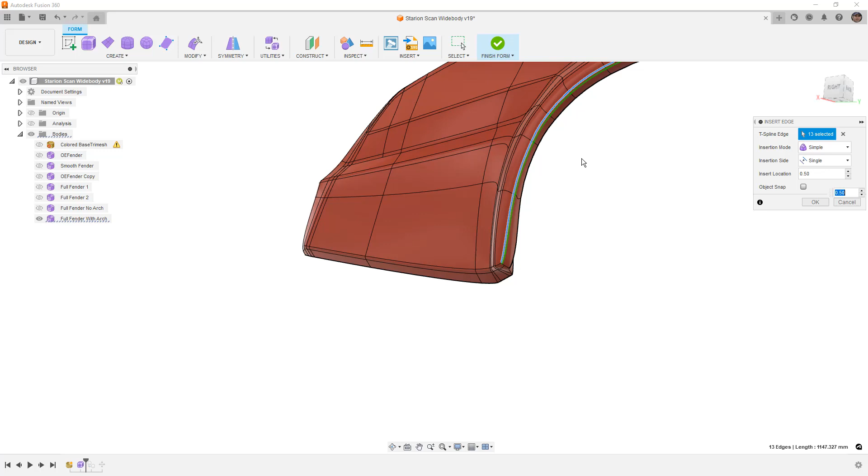I'm going to go in and uncrease it. And after we uncrease it, then we need to go back and insert another edge or bevel it. So that way we are controlling it a bit tighter. Again, less than ideal, especially since we had that crease there for a reason. And this corner is probably going to bite us later. What I want to do is I'm just going to make some adjustments to it. Potentially pull some of this down.

So modify, and let's just see. We want to grab those two and pull them down. Take a look at the OEM. So basically what we're going to do is we're going to build a straight line wherever the OEM air dam would be. So I'm not really sure what to do with the air dam just yet, but I do want this to be able to sort of end where the OEM air dam is, and then I can decide if I want to build a new one or if I want to keep the original sort of shape and maybe build a little piece that attaches to it to get that extra shape or change.

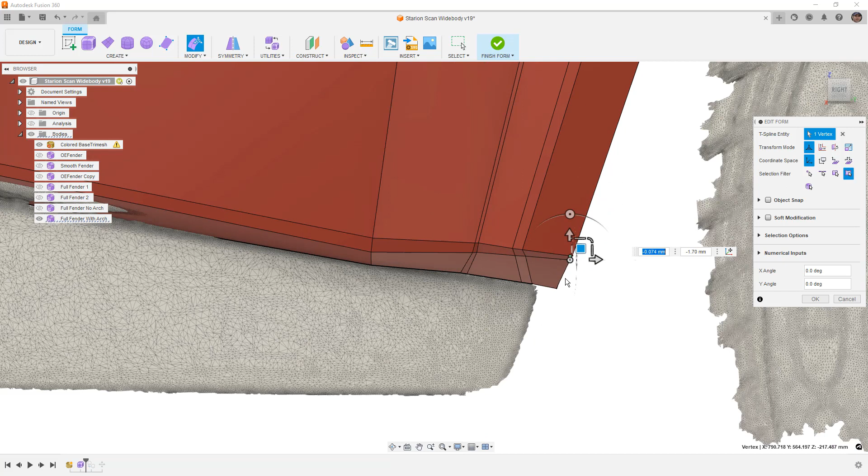But we're just going to keep manipulating, and this is kind of the name of the game. When you start working with these forms, like I said, it takes a lot of time. You could really just spend a whole lot of time and effort making these minute changes to get everything perfect. It's much easier when you have a good game plan and you take the time to do things like scale the edges or rotate the edges or move them all together, because then you're not dealing with this same sort of problem. But now you can see this is roughly where the bumper is. Probably need to make some adjustments, but overall that looks pretty good.

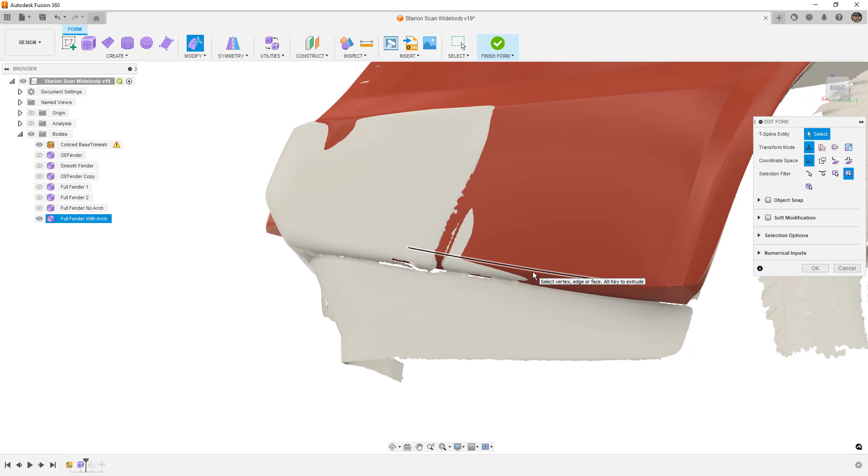I do want to roll it a bit more, but this is all stuff that we've done, and I don't think it's really worth the time going through and having you watch me do all of that. So I want to make sure that we focus our attention on the pieces that are new, which a lot of the stuff we did in this video was kind of a new approach.

On the backside, I think, the OEM bottom of the fender is kind of here. It rolls under the car, and there's a sill underneath, or on the wide bodies, there's a side skirt that goes over that. Likely what I would do is build a side skirt that goes where the bottom of the door is. But since I didn't scan the door and the rear fender, I don't have all the data for that.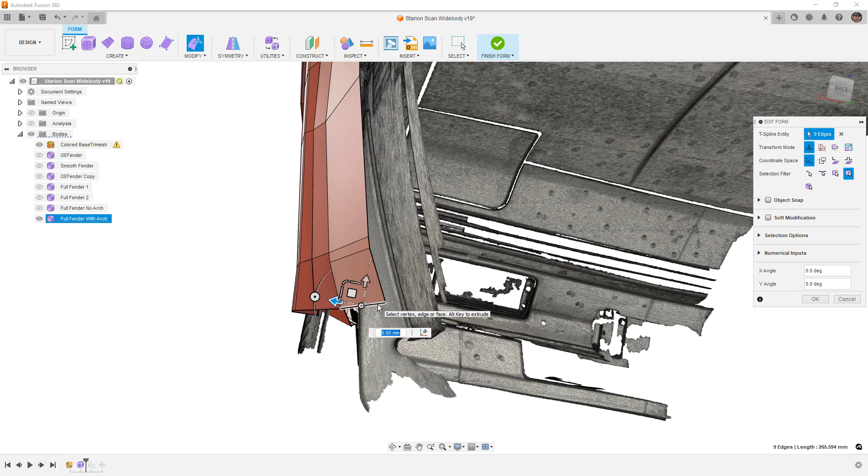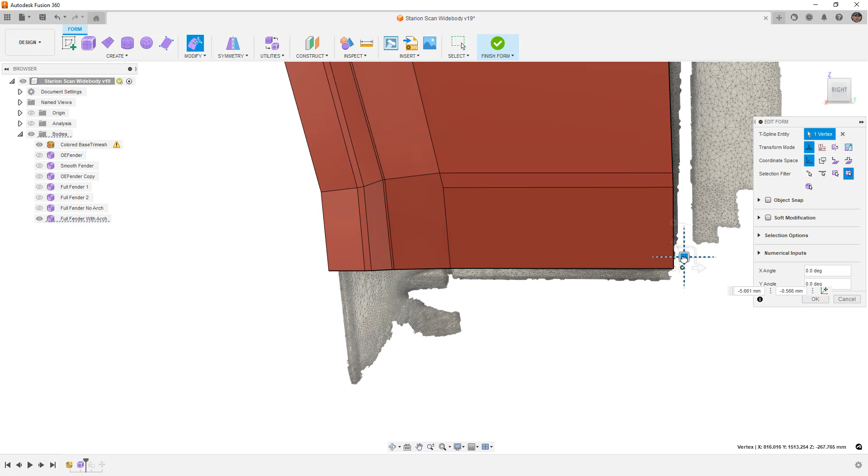So what I'm likely going to do is take this edge and pull it down to meet that. So I'm just going to scale it vertically and then move it sort of down and back. Maybe pull this one forward a little bit. And then I'm going to take a couple of these edges. Let's see how many. Let's take all of these actually. I take all of these edges up until here, and I'm going to extrude them backwards. So hold down Alt, just bring it back.

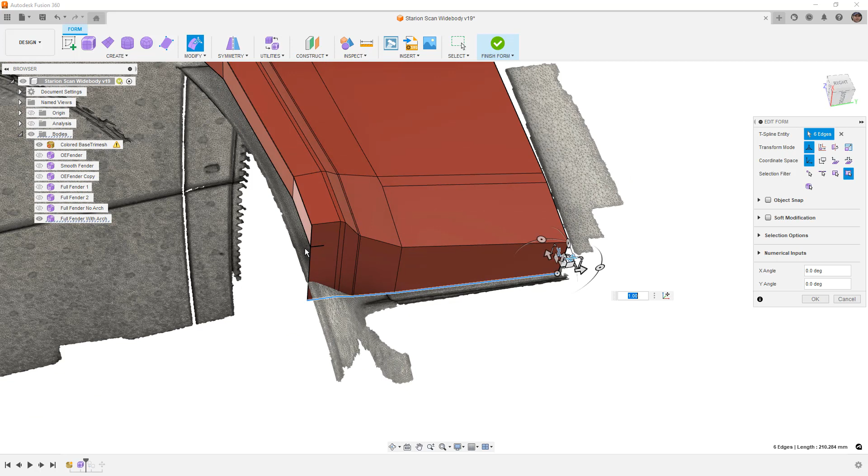Remember, in box display, what we're looking for here is a good idea of the overall shape. So with that edge still selected, I'm going to come back to the back, and I'm going to scale these, again, pulling them mostly straight. I'm going to worry later about how it's going to fit, because ultimately to tuck a bigger wheel in here, all of the OEM stuff is going to have to get cut away. So I am going to have to deal with that.

But then I can take this edge and just move it forward, or I guess backwards, based on how we're looking at it, and I'm going to merge that together. So we'll use weld vertices and stick all of that together. It's taking a little bit of time each time I make some of these moves and convert it. And that's because even though we're looking at it in box display, in the back end, it's actually recalculating all of those extra little pieces.

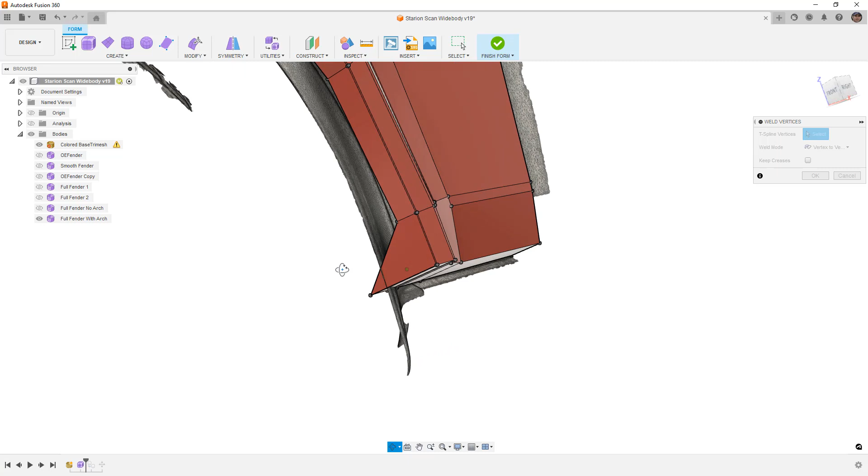Keep in mind that when we do stuff like this, what we're ultimately doing is building a surface that's going to get thickened in most cases, right? Because this is open. So we do want to make sure that we take the time and get most of these pieces right. I'm going to add another edge down here using insert point and just carry that forward up until there. And then I want to take this edge and I'm going to bevel it.

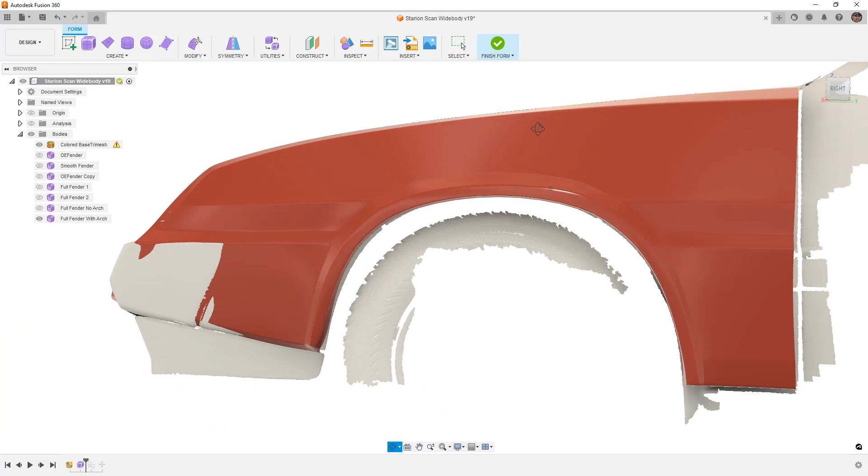All right, so now let's take a look at this. Smooth display, Control and 3. And I think we're pretty much there. I could spend a lot of time doing some fine refinements, and I'll probably do that between videos. But overall, this looks pretty good. I think that I want to work in this area a little bit. As I move it around, you can kind of see there's a little bit of a shadow there. It's probably based on this edge and the way in which that edge sort of works here.

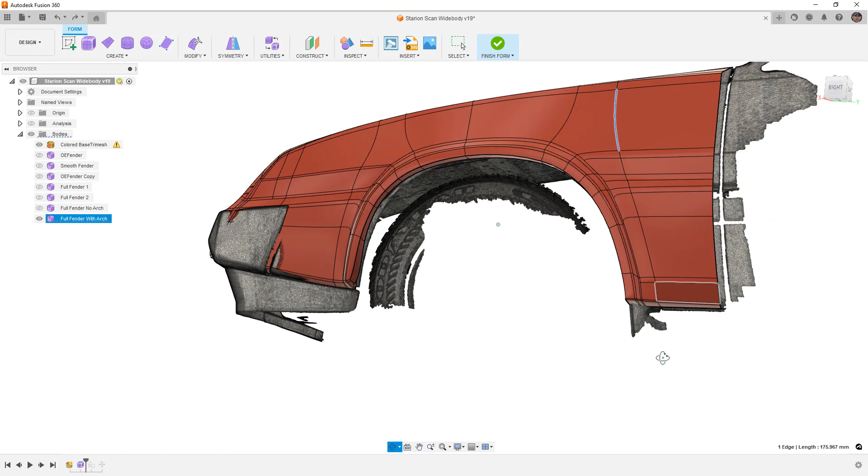Now you can try to completely delete an edge and see what the smooth display looks like. In some cases it might actually be okay. So in this case, that smoothed it out pretty well. You might not be able to meet the geometry at the top anymore. So you have to really think about where you need the control. So if I was going to do this, I might go all the way to the bottom, maybe to there, and delete that, leaving that T-point up top. And that way the fender is okay, but you can see it kind of leaves a crease up top.

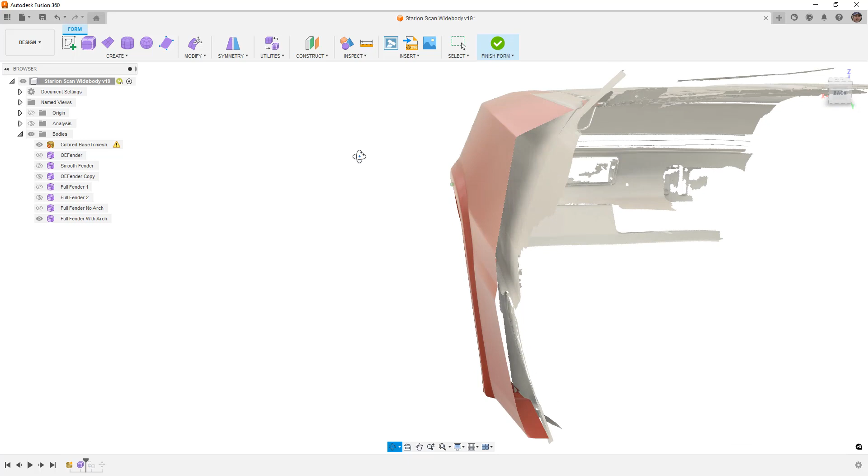So maybe get rid of a couple more edges. Yeah, it basically just does not like having that edge there. So again, these are things that you're just going to have to look at, play around with, figure out what your design needs to look like and where these edges make sense. I think that's okay. Probably would want to make a little bit of adjustment. You can see it's below the fender there. But overall, I think we sort of hit the mark.

Again, off video, I'm going to go through it and make a bunch of adjustments. I'm going to make a quick save. I haven't saved it at all. But we're going to make a bunch of adjustments off of the video. But let's go ahead and hop into render, which is automatically going to force a finished form.

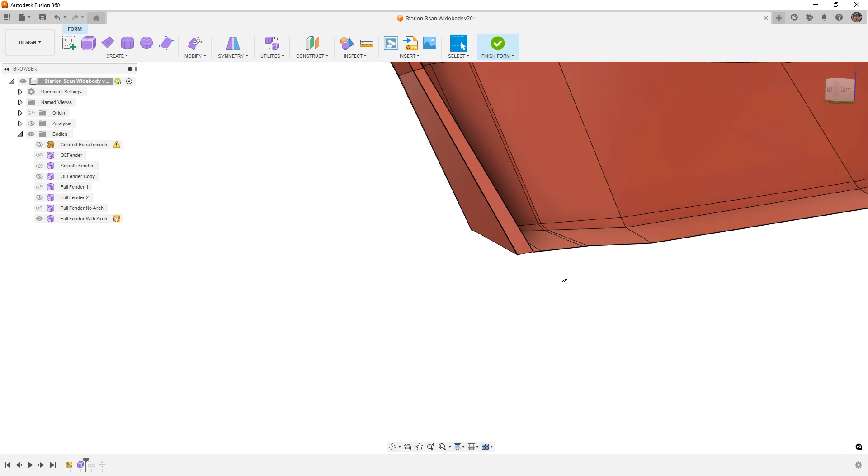Let's see. It does not like this. There's something that self-intersects, so it looks like I'm going to need to put a little bit more work into it now. Probably an issue with this right here. So I'm going to go to box display, see if I can find where there's a problem. Again, it probably doesn't like this. Yeah, so you can see right there.

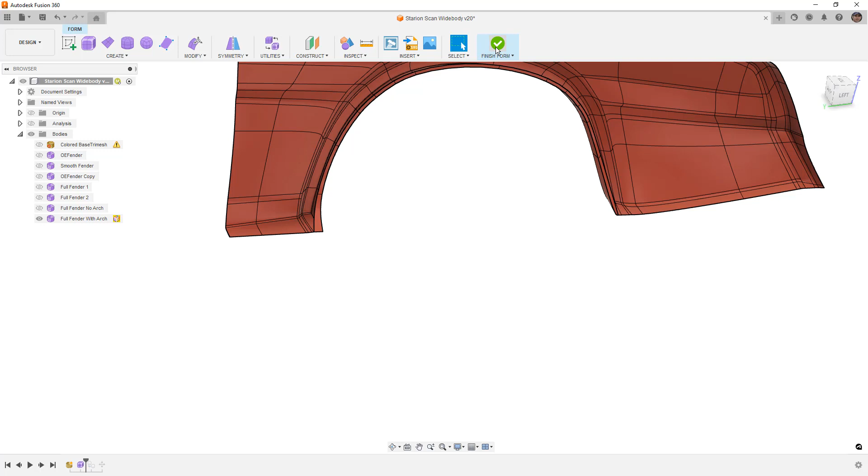So what's happening is this edge right here isn't creased, and this side's probably the same. That side's okay. So that edge isn't creased. A quick fix is to just crease that, and I'm going to do the same thing over here. Generally not a good idea to roll back on it like that unless we're going to fill it completely in. But once we have a crease there, finishing the form should be fine.

It still says that there's a self-intersection, and it's highlighting it here in red. So let's figure out what's going on there. In order to really identify this, in box display, I don't really notice an issue, but this face that we have selected, you can see right there that this corner is actually not attached. So if I move this out, you can see there's like this extra lip that's not attached. It's just kind of open in there.

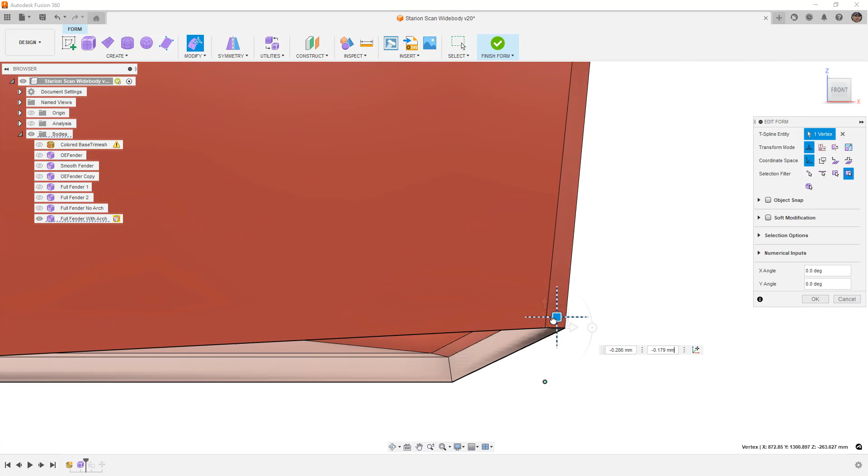So this is stuff that sometimes you can't instantly see when you're just looking at things in the smooth display or the box display. But what I'm going to do is take that, use weld vertices, and just pull that back to here. And hopefully that fixes the problem. So it looks a bit better. Could spend some more time finessing that, but now it lets us finish.

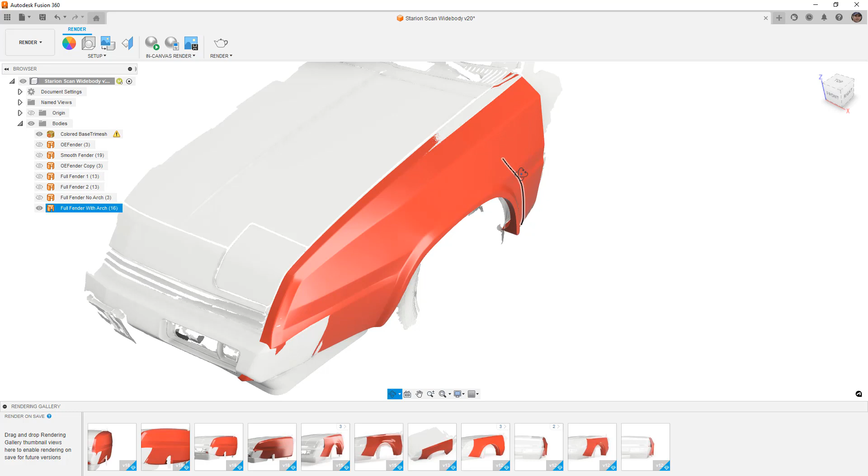Okay. So we're going to bring back that fender, and I'm going to go into render and just take a look at it. So everything's looking pretty good. I've got the nice hard lines that I'm looking for. It's sitting a little bit below the fender. Before we're completely done, we'll push that up to the mesh, and we can see how much wider it is at the front. So a little piece for the air dam to fill in that gap could be fine. Again, because the front is still the same, it could just build off of there because it still matches the bumper up until here. And on the back side, we've got our gap with the door.

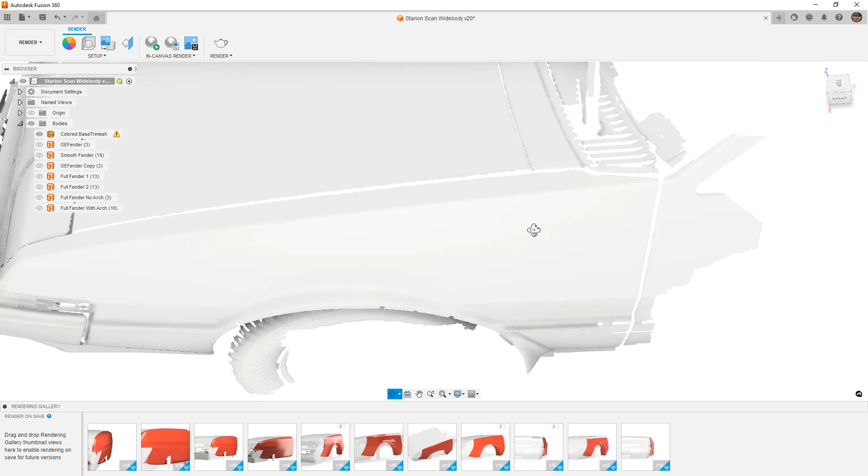So what we really want to see, which might be hard to see here, is that the lines of the fender are, okay, that's really hard to see. What we want to identify is the lines on the fender, this faint line right here, which is kind of hard to see. From the side, we want that line and this line to be at the same height. And the reason for that is because that line carries onto the door and it actually wraps up to the roof. And I want that line to be part of the design.

So from the side, this could just look like something from the factory, and then you rotate it around and it's just quite a bit wider. So I think we did a pretty good job of nailing that. There are some potential issues that I need to deal with in here, the way that these creases work, but overall that looks pretty good. So yeah, I'm gonna do a couple renders of this and just make sure I'm happy with the shape.

And I think that overall, this ended up being a good mix of design elements that matched the original shape of the car, which I wanted to preserve because it is unique. There weren't very many of them, and there's so many more wide bodies out there. But this gives me the ability to put wider tires underneath.

So at this stage, the next part of this process is to make this a solid after I do some more modifications to it. And then we need to start doing the surfacing work, or we need to figure out where the cuts need to be for the marker light and all of those extra little pieces before it's a solid and before we can start 3D printing sections of it to fit it to the car.